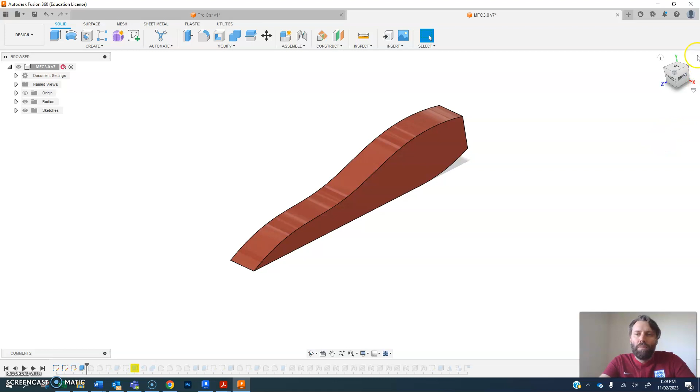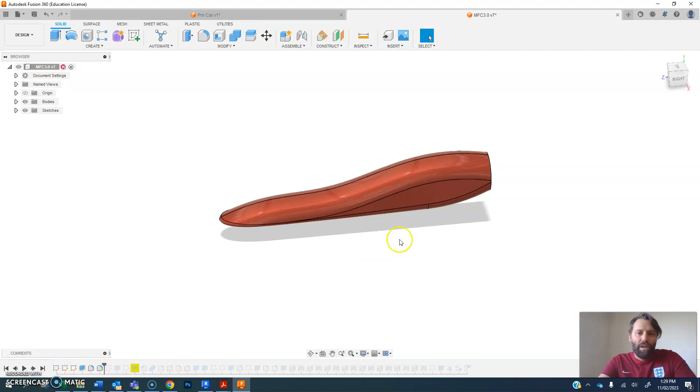There's nothing to say you have to do it like that. It works quite well for my first car as a way of building this entire form. I guess the drawback is that the front of the car is as wide as the back of the car. Now that's fine, and with wheel width and that sort of stuff, wheel placement, that's helpful, especially when you're making a basic car.

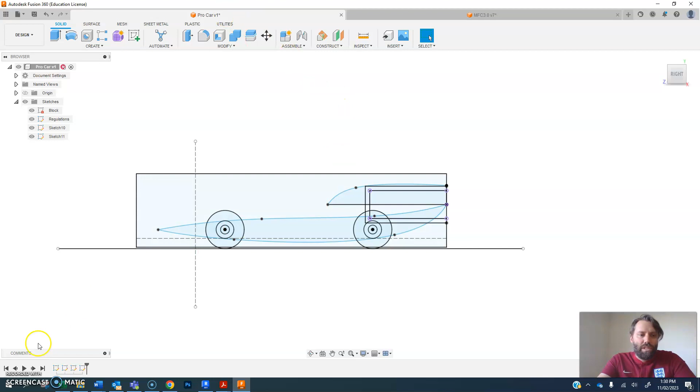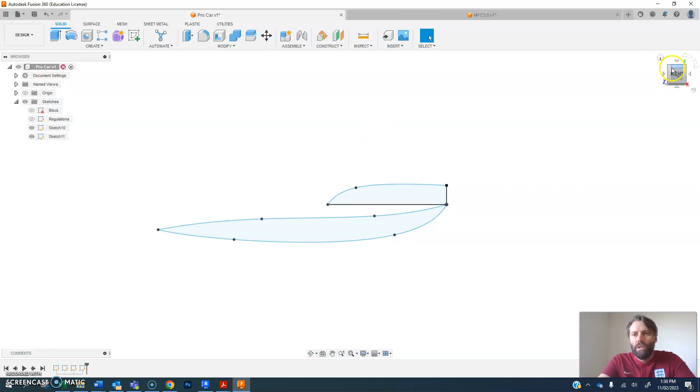But there's nothing to say that you can't build the cylinder housing and the body as two separate parts. So I've got an example here. I've created my two regulations, a sketch for my cylinder housing which will have my chamber in it, and then another sketch for my body. I'm going to revolve this one and extrude this one, so this might create a slightly different looking thing.

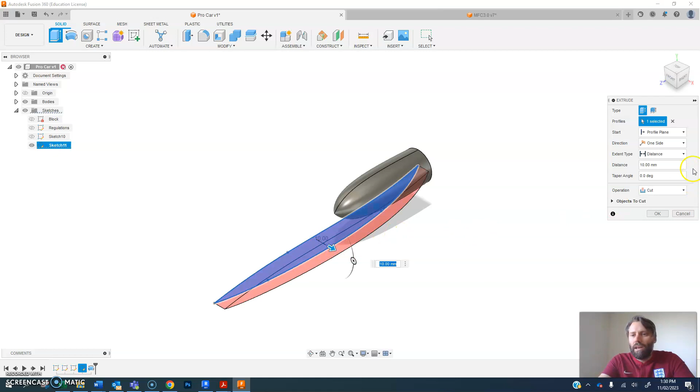So I'm going to revolve this shape around this axis and make sure it's 360 degrees. And I'll create my body as a separate thing, and I can make that a little bit thinner. So we'll go symmetrical, join, at 20 mil, 10 mil each side.

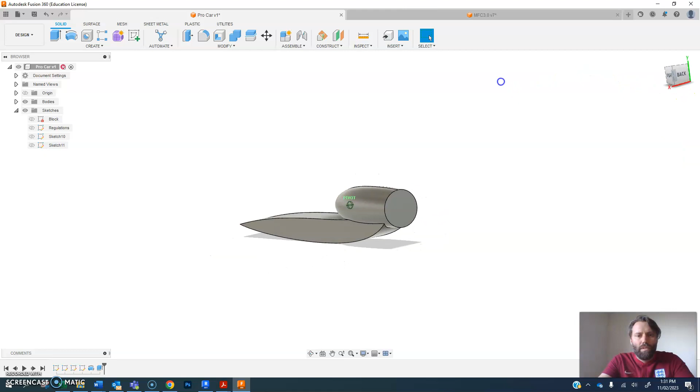Now, pros and cons of doing this: having the body thinner through here is obviously pretty neat. It's obviously less weight and it's a bit more streamlined, skinnier, I guess.

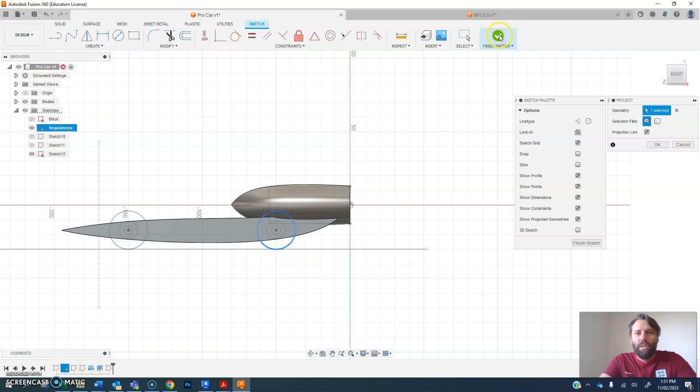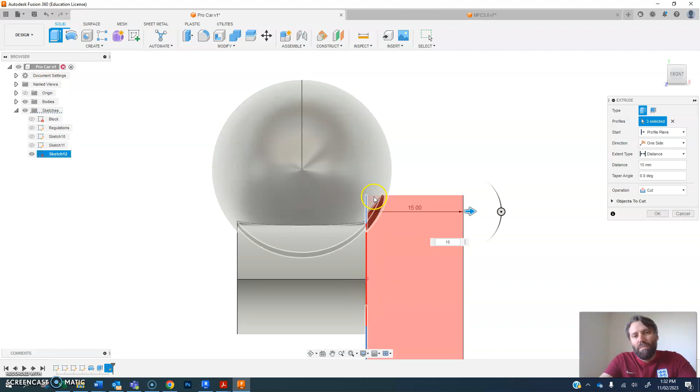The problem is if you mount your wheels flush on the side of this part of the body of your car... I'll just open up my regulations template and project this wheel in. So your back wheel is more likely to have issues because if it's flush against this part of the body, it's actually rubbing against the cylinder housing there, as you can see with that cut extrude.

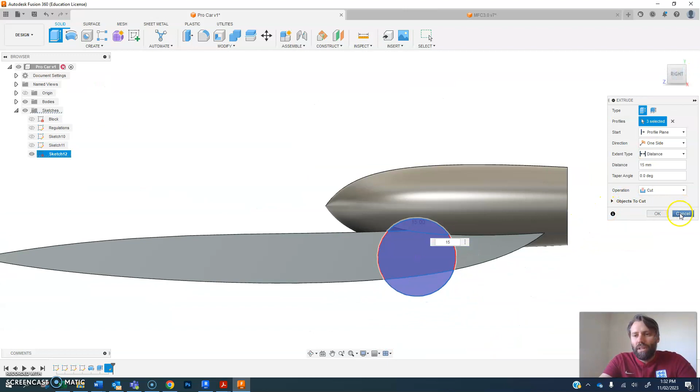So it will cause problems like that. There's ways you can fix that - wheel support systems might make the wheels stick out a tiny bit more, or the wheels might sit further forwards of the cylinder chamber. It's up to you, that's sort of an issue you have to resolve, I guess. But I think you could create a really neat looking car this way.

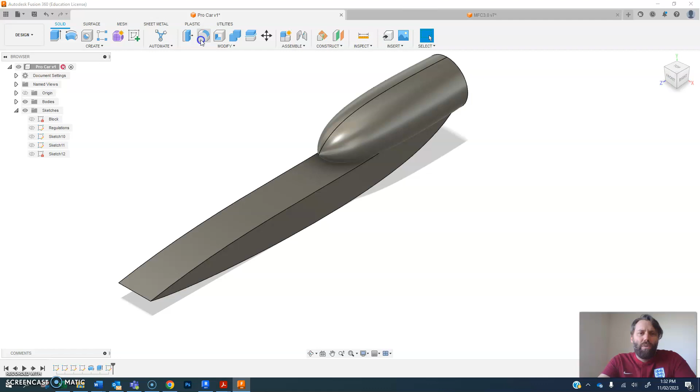When you create your body, what I'd recommend instead of doing it as a join straight away, is possibly doing it as a new body. That way you'll be able to get some neat fillets onto this part of the car, independent of your cylinder chamber. Then you'll be able to join the two together, combine.

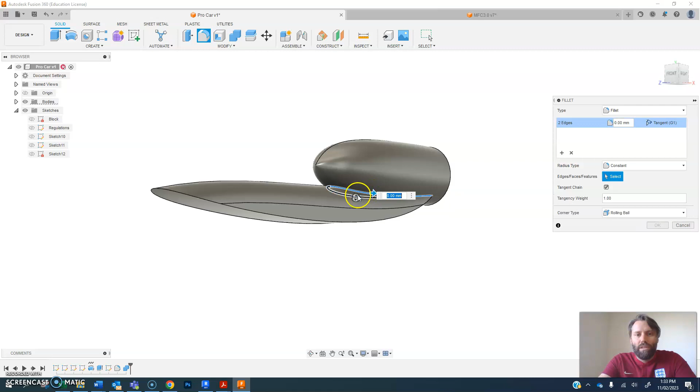And then you could put a sweet fillet between the two here. It doesn't want to do a 5 mil fillet... there we go.

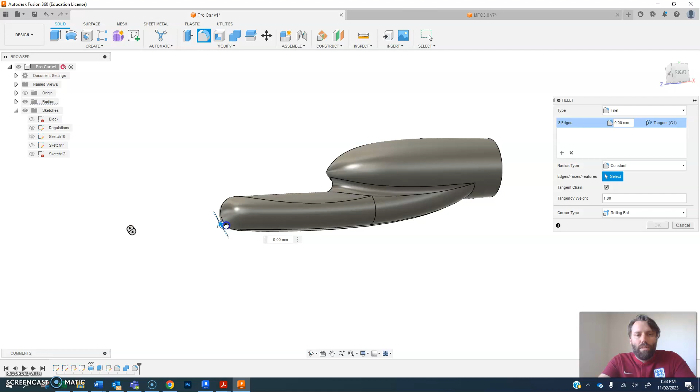Cool, and then of course you could do one along the bottom edge as well, but I'll fillet it in under here - it's going to really shorten my nose off. That's a bit much, I might leave that one for the moment.

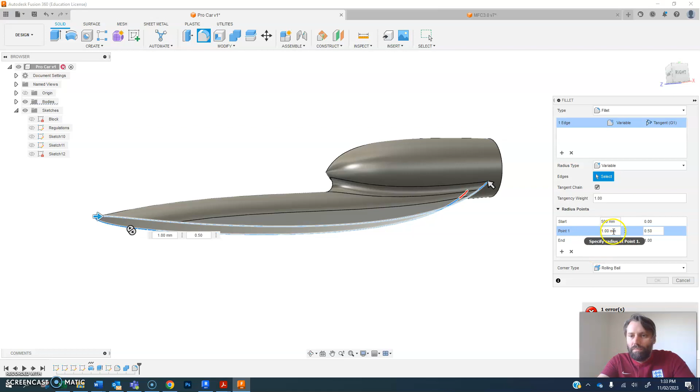You can also do a variable radius fillet across there as well. So if I go variable at the start and end, I want it to be a 5 mil fillet, and then here I just want it to be like a 1 mil fillet. So there's nothing to stop me from having a variable radius fillet to adjust that.

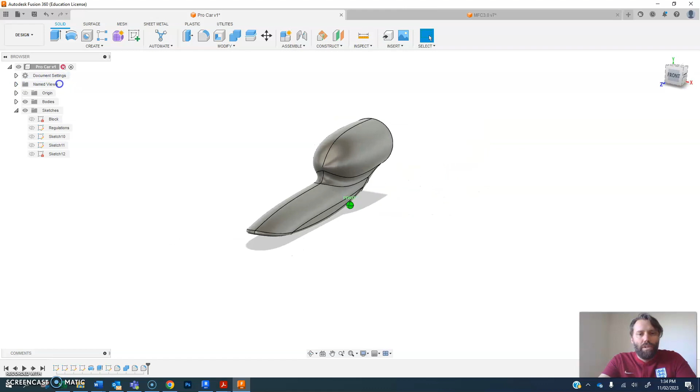It's an unusual looking thing, but it's something different, and hopefully something which is a little bit more streamlined. Obviously I've still got to add my side pods and all that sort of stuff onto this design, but that's one way you could go about creating your body and your cylinder housing as separate parts for your professional car project.

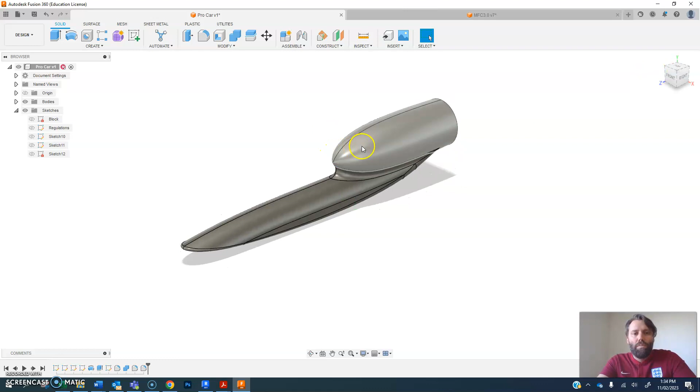You don't have to. You could also use the form tool to create your car, which I'll talk about in another video.